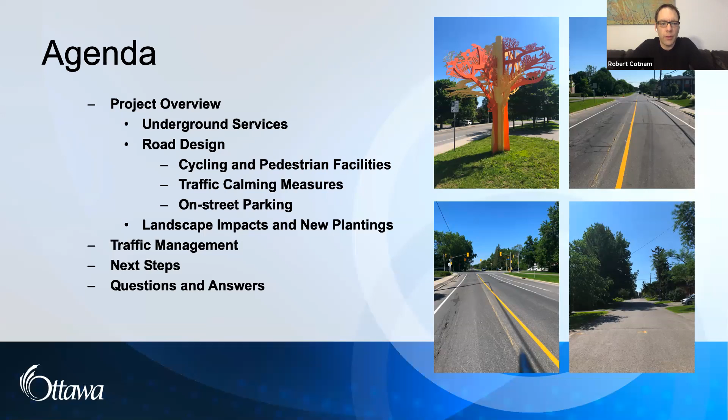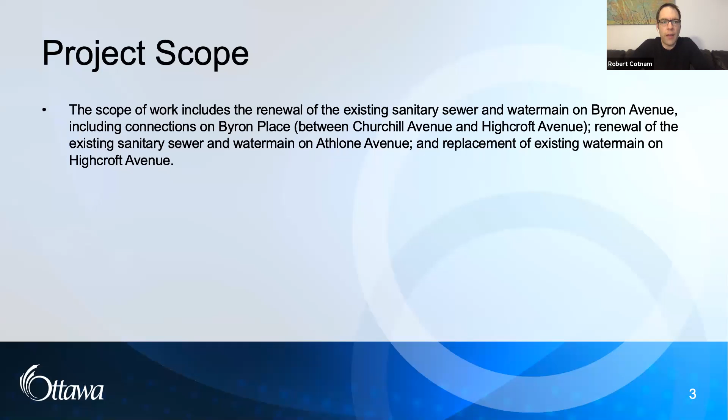As Kevin mentioned, this project is being driven as an underground project, being an integrated road reconstruction. It starts with the underground works, and because of the extent of the underground works, it warrants the full reconstruction of the surface. Taking advantage of that reconstruction, we're able to implement traffic calming measures in accordance with the Byron Avenue traffic calming design and the city's road safety initiatives, and provide enhanced cycling accommodations through the corridor, as well as bringing the pedestrian accommodations up to current city standards.

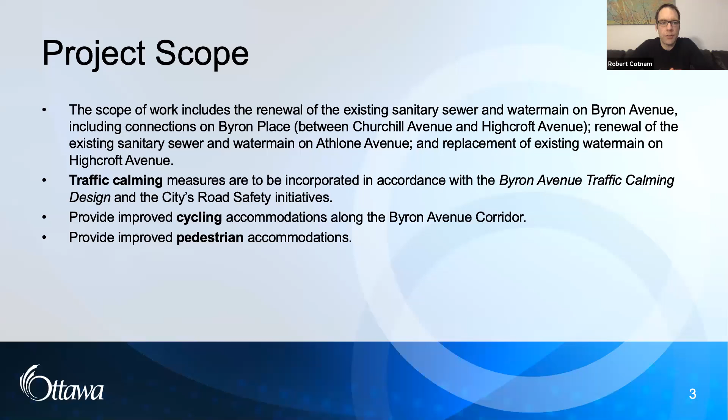Just quickly to run through the underground services for the project. As Kevin mentioned, the system is quite old, around 80 years old, and has reached the end of its serviceable life. As such, we'll be replacing the existing sanitary sewer with a new 250 millimeter sewer from Churchill to the hydro corridor, and then 250 to 450 from the hydro corridor to Hilson.

As well as a new 200 millimeter water main throughout Byron. For Athlone, similar situation - the sanitary sewer is quite old, being replaced with the 250 sanitary sewer from Byron Avenue to the dead end, as well as the 200 millimeter water main from Byron to Clare through the park. Highcroft is limited to just the 200 millimeter water main - the sewer there is not quite as old and still in good state, so it doesn't warrant replacement.

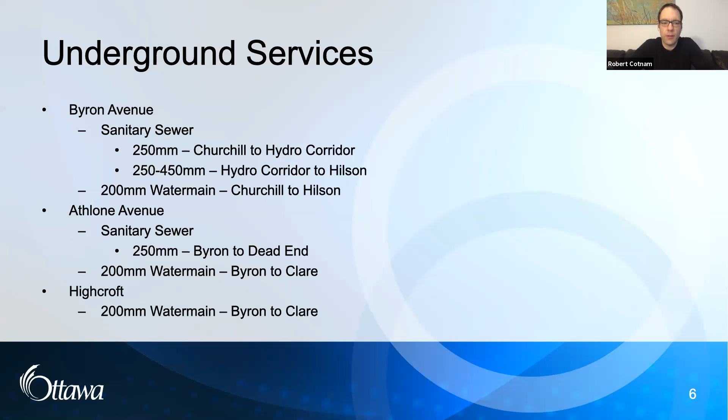For Athlone, we have the water main down the east side of the corridor with the link through the park. You can see there's some deviation in the alignment of the water main through the park - that was to protect the existing trees in the park - and the sanitary sewer down the center. Highcroft Avenue, the works are limited to water main along the east curb line, so that'll be completed through trench reinstatement.

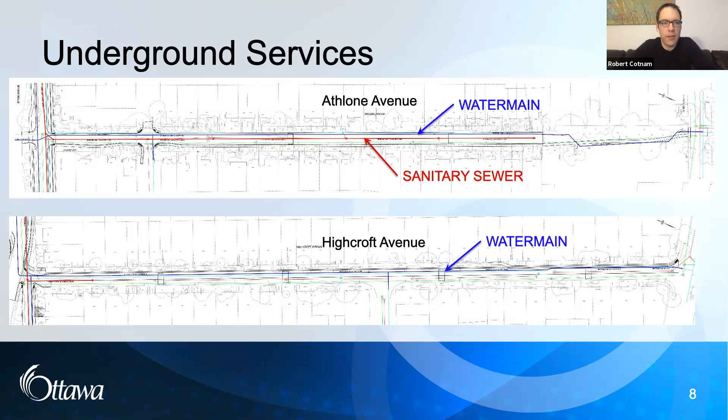Now moving on to some of the highlights for the road design for Byron Avenue, from Highcroft to Tweedsmuir, and Tweedsmuir to Hilson, and then I'll touch on a few key features, including the Kirkwood intersection and the Byron Avenue parking bay.

For the road design from Highcroft to Tweedsmuir on Byron, we're providing 4-meter lanes with some localized narrowings down to 3.5 meters, in accordance with the Byron Avenue traffic calming design and additional measures from the city's road safety initiatives. We're providing a 1.8-meter wide cycle track on both sides—segregated cycling facilities to get the bikes off the road.

There's a 1.8-meter sidewalk on the south side, bringing it up to current design standards. Included with that is the 200-millimeter demarcation stone for the Accessibility for Ontarians with Disabilities Act requirements. It's a paver stone with a pattern on top that's cane detectable, providing guidance to visually impaired pedestrians so they don't end up in conflict with the cycling facilities.

Traffic calming measures, as mentioned, include speed humps, intersection narrowings, and raised crossings in accordance with the Byron Avenue traffic calming design and the city's new initiatives. We've included a raised PXO Type C at Tweedsmuir—Type C being the pedestrian-activated flashing lights, the rapidly flashing beacons. Then there's the on-street parking bay from Eden to Athlone, with a few modifications as well.

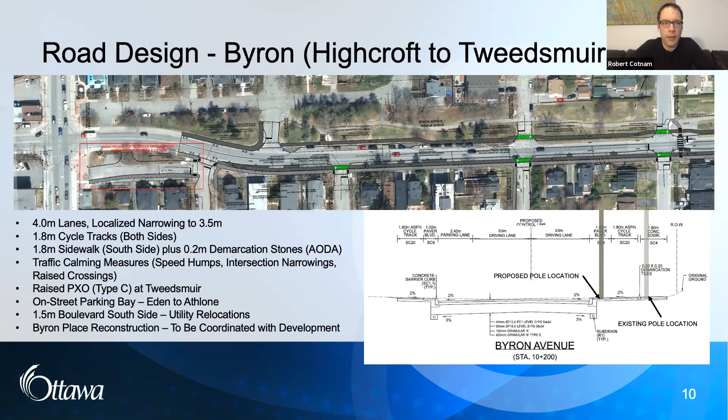A little more detail on some design highlights: between Byron from Tweedsmuir to Hilson, there are 4.0-meter lanes narrowing to 3.5 again, with 1.8-meter cycle tracks continuous on both sides, and a 1.8-meter sidewalk on the south side with the demarcation stone for AODA requirements. As Kevin mentioned, there's a protected intersection at Kirkwood, which I'll detail in a couple of slides.

Traffic calming measures again include speed humps, intersection narrowings, and raised crossings. The PXO at Hilson will be maintained—that's the current limit of our project, so we're endeavoring not to impact it, but if we do extend beyond it, it will be reinstated. There's again a 1.5-meter boulevard on the south side. There's no pole line through this section, but we do expect street lighting poles will need to be provided, so they'll be situated within that boulevard.

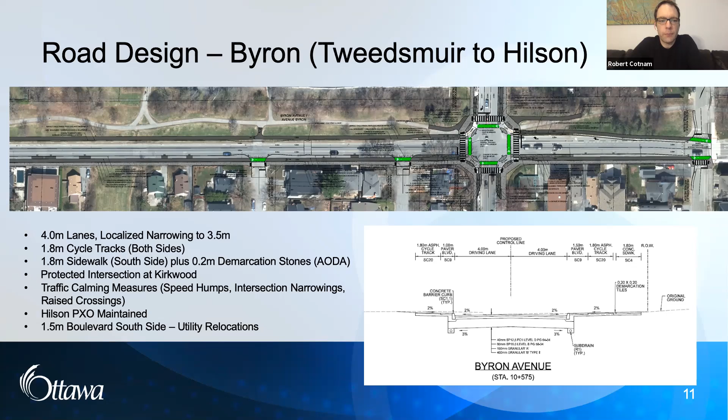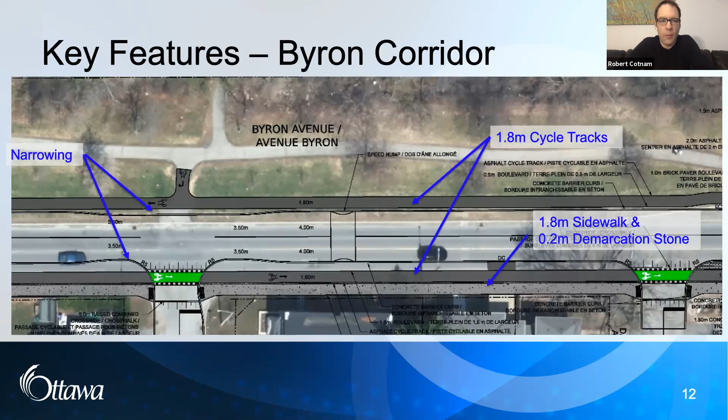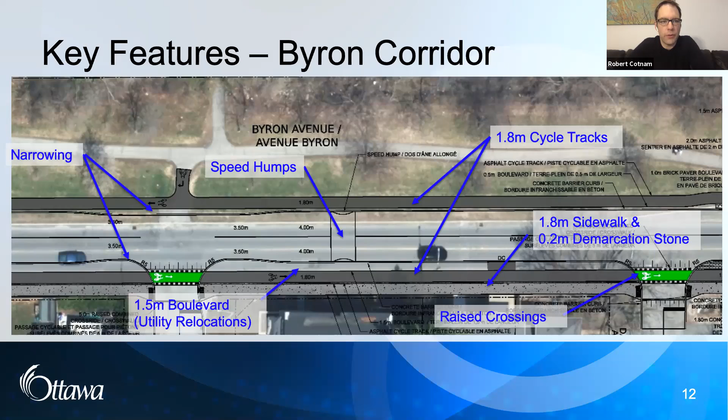Now some more in-depth detail on these elements: the 1.8-meter cycle track is the segregated facility keeping cyclists off the roads. There's an upgraded sidewalk with AODA demarcation stones, road narrowings at intersections as well as mid-block in some locations, speed humps at locations outlined in the Byron Avenue traffic calming design, and raised crossings at all intersecting streets with the exception of the protected intersection at Kirkwood. And as mentioned, the 1.5-meter boulevard is for utility relocations.

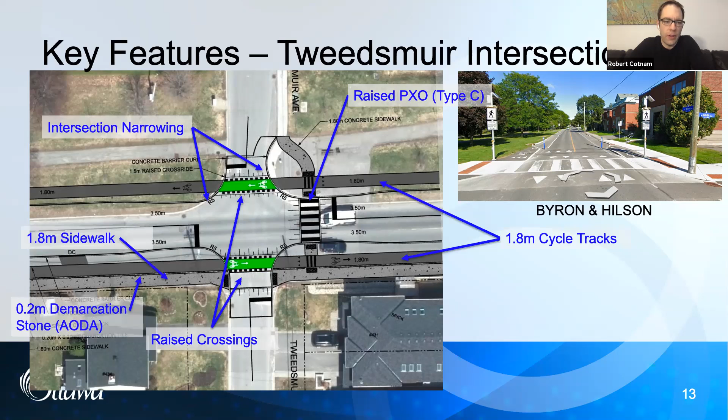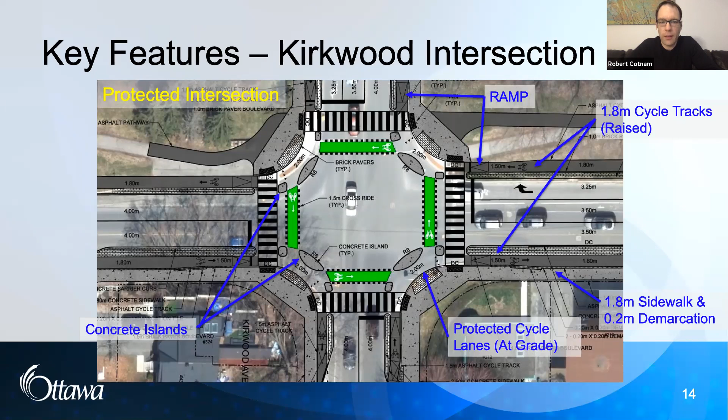Some key features of this design are the raised cycle tracks on approach to the intersection, ramping down at the intersection, with protected lanes around the perimeter where cyclists travel counterclockwise, protected from general traffic by concrete islands. There are also pedestrian and demarcation facilities incorporated as well. I also want to highlight the Byron Avenue linear park—we've provided linkages to the existing pathway through there.

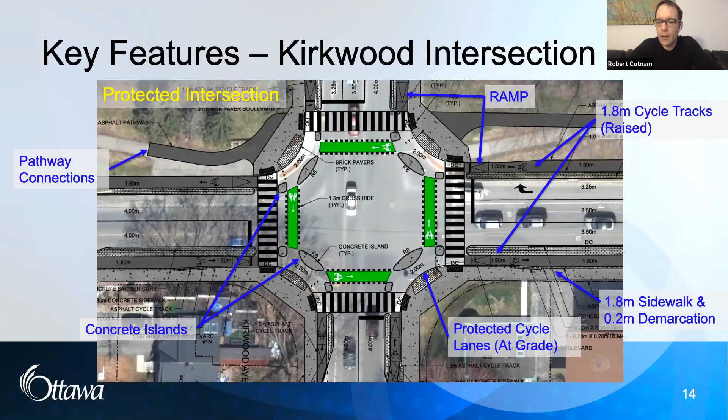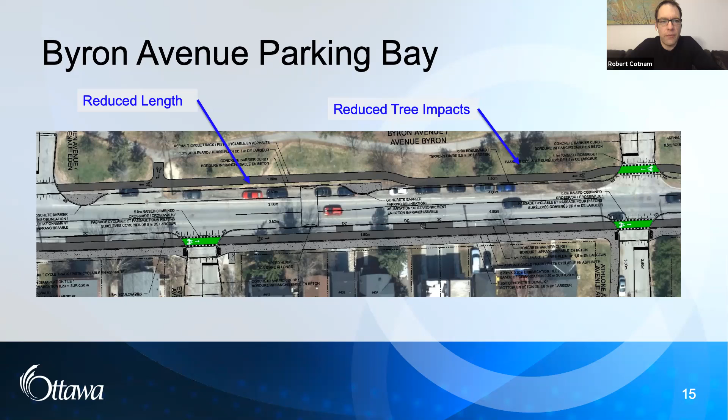Moving on to the Byron Avenue parking bay, a few modifications have been identified. Curbing is provided for better definition to keep vehicles from encroaching on the park and damaging the park space. It's also been shortened to reduce impacts on the park, since some trees toward the east end would have been impacted if the full bay had been reinstated. So it's been shortened up and better defined.

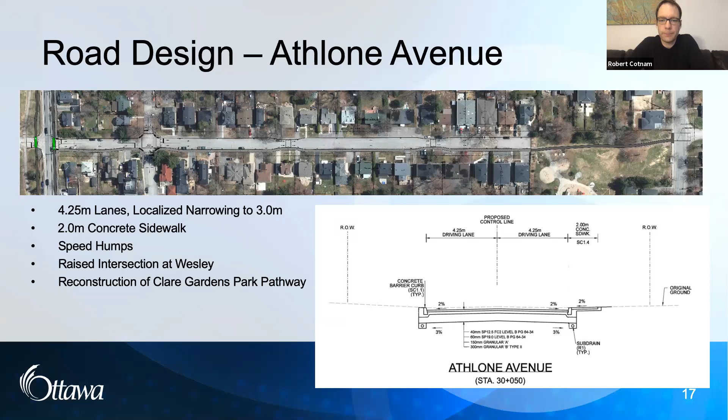I'll zoom in here for a bit more detail on the corridor. There's a 2 meter sidewalk along the west side, as mentioned, and a raised intersection at Wesley with an intersection narrowing. One feature of this narrowing is the rather large tree in the southwest quadrant of the corridor.

It was flagged by city forestry as a showstopper for the project, so we've taken every measure we can to protect that tree, including narrowing the road to pull the sidewalk and roadway away from the yard. We'll be looking at further design mitigation to ensure that tree is protected through construction.

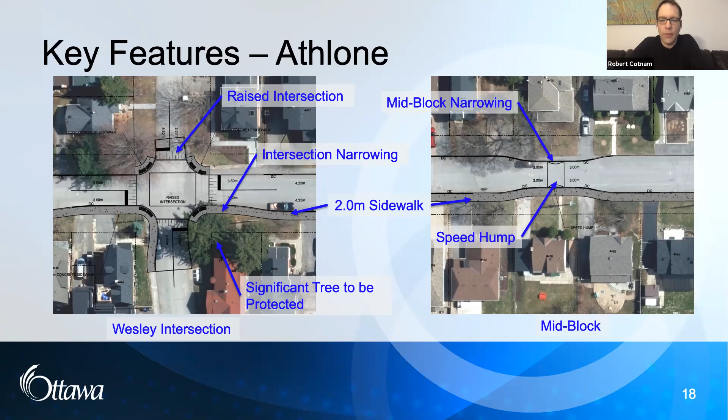For the mid-block section, narrowing to 3 meter lanes with the speed hump as mentioned. Then through Clare Gardens Park, the water main alignment, as noted, meanders a bit - that's by design to protect the trees through the park.

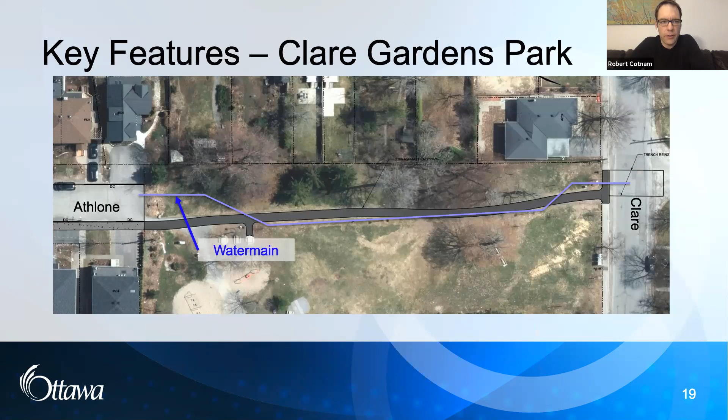There are some very significant trees along the pathway. One element to point out is that park access will be maintained through construction - the construction zone will be fenced off to keep the public away, but still allow access to the park.

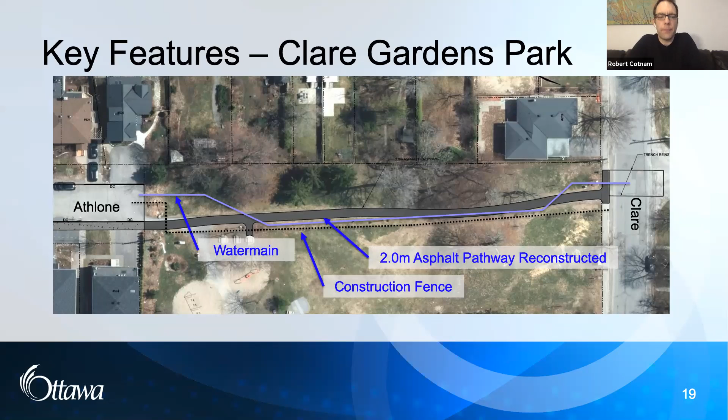The 2 meter asphalt pathway will be reconstructed because of the water main construction, and the trees will be protected. We've reviewed the alignment of the water main with both parks and forestry, and they're both satisfied with what we've presented as a way of mitigating any impacts on the trees or the park.

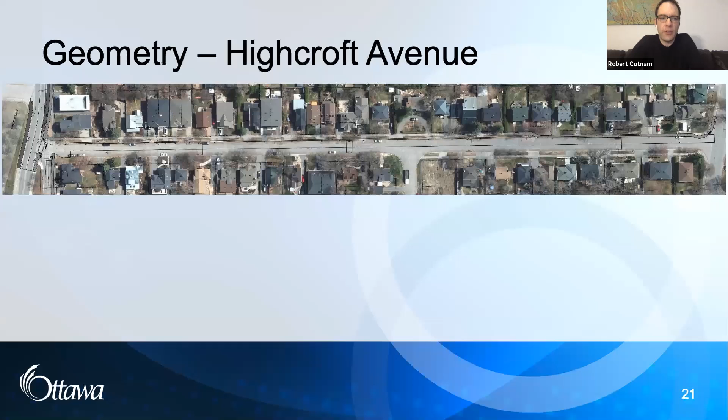For Highcroft Avenue, some key elements: it's a trench reinstatement where the existing road width is maintained. There's a narrowing at Clare, identified as part of the traffic calming initiatives.

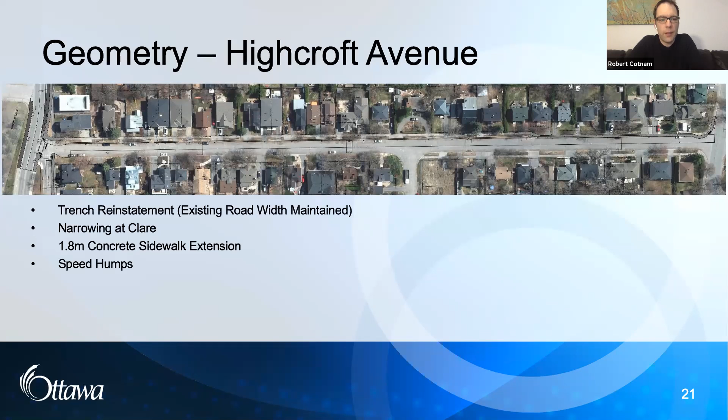There's a 1.8 meter concrete sidewalk extension. The current asphalt pathway along the east side stops about two-thirds of the way to Clare. We're extending it all the way to provide that pedestrian link, including speed humps for traffic calming. And as mentioned, the Highcroft Byron Place intersection is being coordinated with the developers.

It's our understanding that the development will be accessing off of Highcroft. As such, they've applied for some road modifications through the city and are spearheading that initiative. Our expectation is that their design will follow ours - we'll reinstate existing conditions, and they will come by and build to suit their needs.

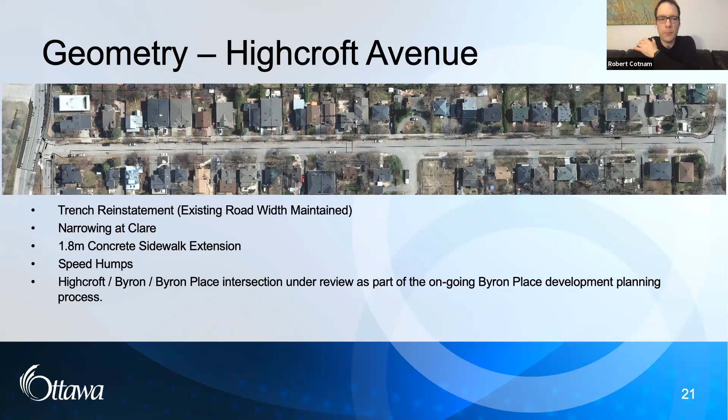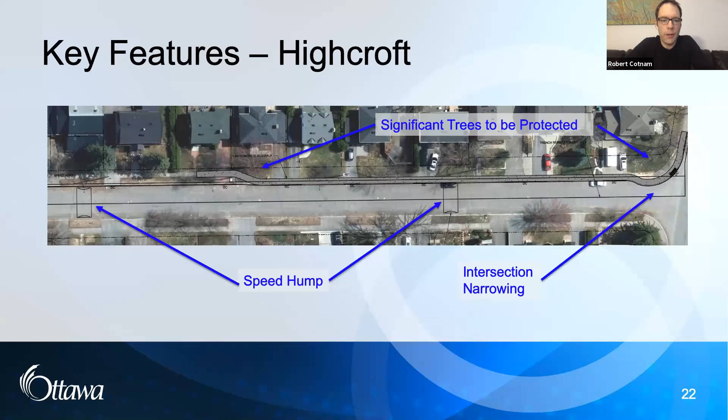Key features on Highcroft: the speed humps for traffic calming, intersection narrowing, and the extension of the sidewalk. As you'll note, the sidewalk deviates to sit behind the curb, and that's to protect some significant trees along the frontages through there.

Now switching over to look at some of the landscaping impacts and new plantings. With projects of this nature, tree impacts are generally unavoidable. We've taken every initiative we can to protect all significant or mature trees and limit the impacts to less robust or less significant trees.

We've gone through with our landscape designer and identified all the tree impacts as well as new trees proposed. As you can see from the summary table, about 23 trees will be impacted, and 89 new trees have been proposed, resulting in a compensation ratio of almost 4-to-1 for every tree impacted - almost 4 trees planted for each one.

So just to highlight some of the landscape elements, the final design of the Byron Place landscape is being coordinated with the developers, as I mentioned. The Byron Avenue parking bay has been reduced to mitigate impacts on the trees along the Byron section, between Evered and Athlone.

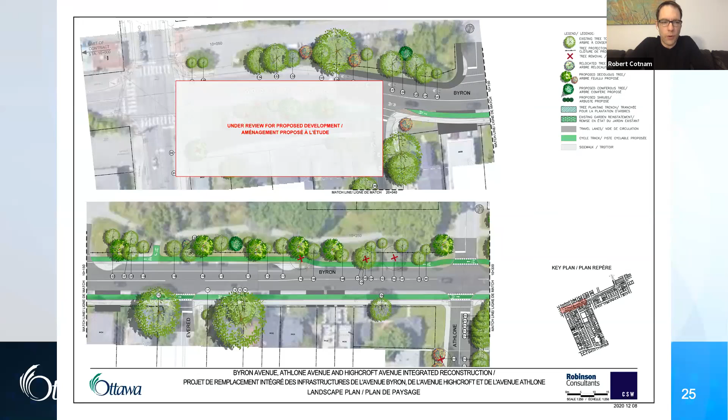Where there are a few trees that have still been impacted, compensation trees have been provided. I want to note there are some rather large private trees on private lands on the south side, which will be protected.

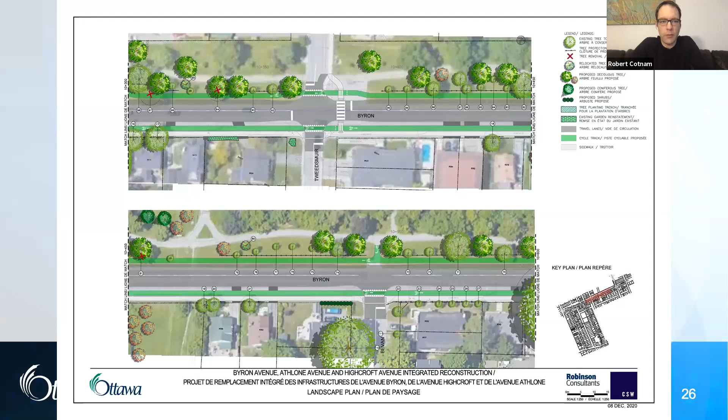Moving through Byron past Tweedsmuir and Bevan, there will be new trees all throughout the linear park identified. Then on approach to the Kirkwood intersection, there are a few minor trees on the frontages on the south side that'll be impacted, but compensation trees have been identified throughout.

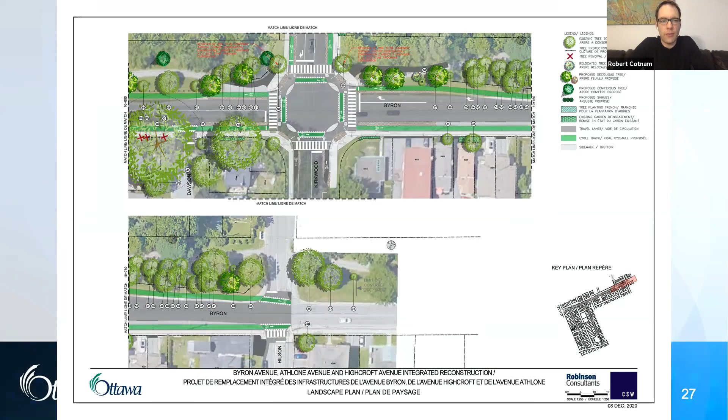At the intersection of Kirkwood, there's some trees nearby the pathway. Our pathway design has been designed to ensure that those trees can be protected as well.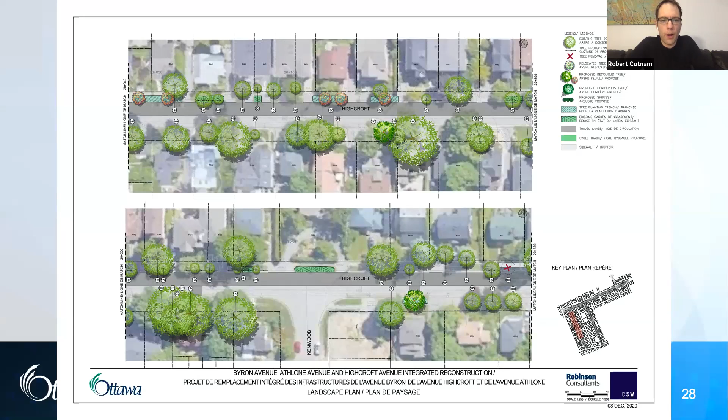Looking at Athlone, large trees, as I mentioned, particularly that one in the southwest quadrant - sorry, this is Highcroft, I jumped ahead there. Highcroft, looking at providing new trees where possible, as well as protecting the existing trees.

As I mentioned, the sidewalk will be shifted to behind the curb to protect the large trees on the frontages on approach to Clare. There's a couple of rather large ones there that city forestry was quite concerned with protecting, so we've modified the design to ensure that those are protected.

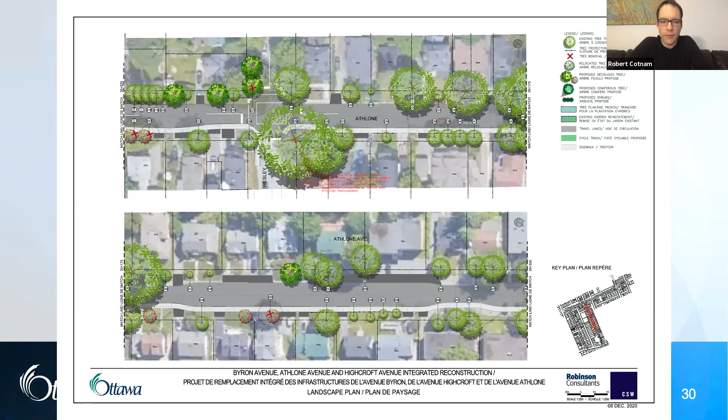Now looking at Athlone, the rather large tree in the corner of Wesley and Athlone, as I mentioned, will be protected. Again, a few trees have been noted as impacted, but significant compensation throughout.

Then Clare Gardens Park, the water main alignment has been situated in an effort to protect all the trees and maintain the trees in the park, as well as provide a bunch of compensation. So that sort of covers the landscape side of it.

Now looking at the traffic management during construction. The traffic management plan is currently in development with the city. We don't expect any full road closures as part of this project, but lane reductions and flagging operations are likely unavoidable.

With that, the cycling and pedestrian service will be continuous. Temporary facilities or detouring will be provided as necessary to ensure full connectivity for cyclists and pedestrians at all times. Transit service is on Clare and Kirkwood, and that will be maintained at all times as well.

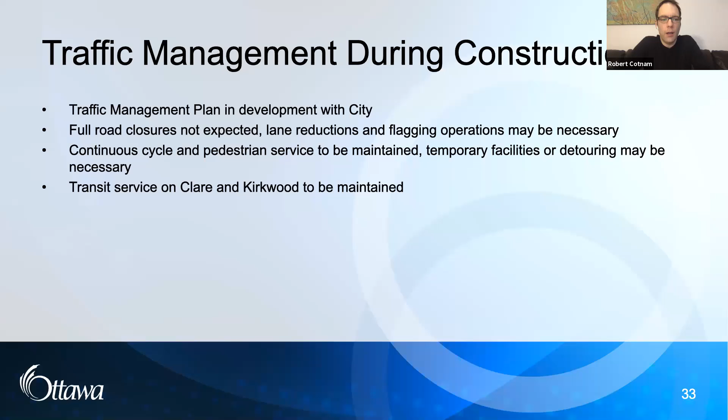Looking at the cycling element, we do know that cycle detouring may be necessary, but fortunately there is the Wesley corridor nearby Byron. So the signed detour we expect will be along Wesley using Hilson, Wesley, Highcroft to get through the project zone.

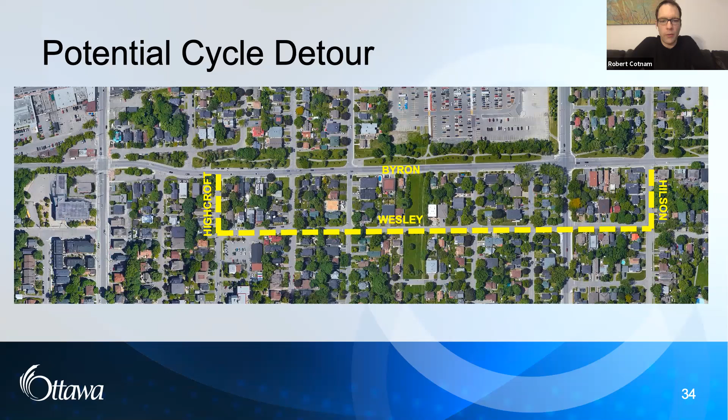But I do note there is the linear park through there as well for the less confident or leisure cyclists to access or traverse the project site. I think the signed detour route, the on-street route, will follow the Hilson, Wesley, Highcroft alignment.

Next step in schedule, as Kevin mentioned, we're going through the consultation process now through December and into January with the comments received. Our detailed design will be initiating into February through the spring, with tendering in the spring, and construction to initiate in late spring, early summer, continuing through fall 2021.

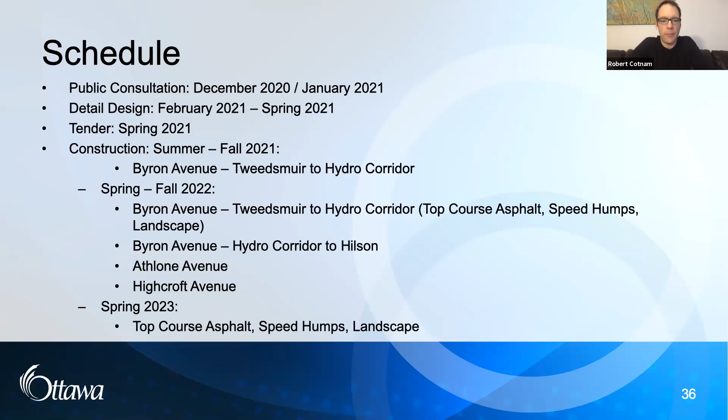Our expectation is the Byron Avenue corridor will be constructed first, with Tweedsmuir to the hydro corridor this year, and then through next construction season, the remainder of Byron plus the Athlone and Highcroft works. There is potential for some carryover into 2023 to provide final lift pavings, traffic calming measures like speed humps, as well as the landscaping elements.

And with that, I'll turn it back over to Kevin, the councillor, for questions. Thank you.

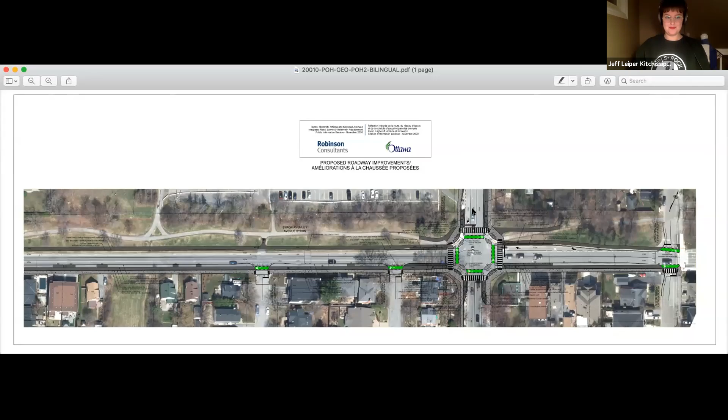All right, is that visible to everybody now? Can maybe just blow it up a bit? Yeah, zooming in there. As Kevin mentioned, there will be the linkages.

Now these connections are still being refined to ensure the impacts on the park are limited. But while this is happening, there'll be some pedestrian barrier or barrier fencing to ensure the work zone is inaccessible to pedestrians and cyclists as well. Temporary facilities or temporary connections are expected. The exact details will be fleshed out as the design progresses and we get into the staging elements of it.

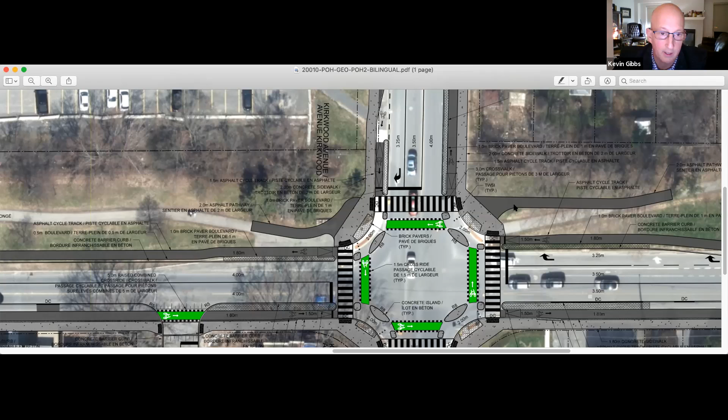Exactly, this is the preliminary design. We're looking at the big picture here and basic layouts. And as we proceed in detailed design, all the details for the connections and how we'll stage it, in terms of one part of this intersection being constructed at a time.

Accessibility and usage are priority one for the city. So we want to make sure we have connectivity with the pathway on both sides of this intersection, and that it's also accessible for people with mobility issues. The details of that will be refined further in the detailed design.

Robert, do you want to look a little bit to the east here, to the west here? I think where we connect up with... there's an interconnection there. Exactly, at Eden as well. Tweedsmuir is on the next drawing, I'll pull that up if you'd like, Kevin. There, just give me one second.

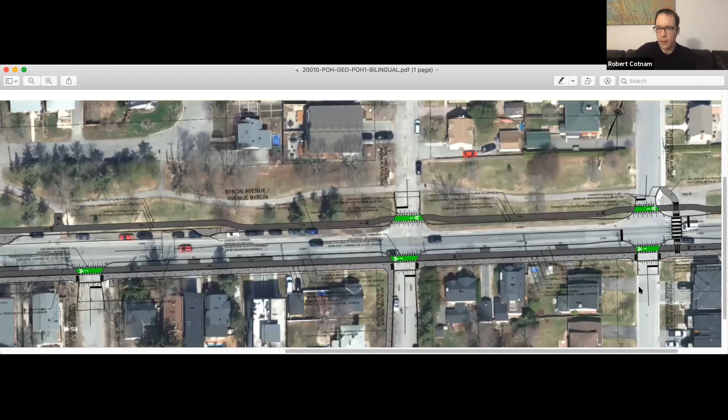And this is the Tweedsmuir. Is that visible there to everyone? Yeah, mhm, yeah.

So throughout, as we develop the detailed design, we're going to be looking at the staging of this work, how we will proceed step by step. And as I mentioned, mobility concerns for the city of Ottawa is a number one priority, not only in terms of its planned installations, but also during construction. This will be taken into account in the detailed design.

Do you want to show a little bit further to the west, Robert? We have the other connection too as well, and then the connection at the parking bay, as you mentioned there, Kevin. Yeah.

We actually have a dedicated team at the city in our department that reviews all designs to ensure that they're AODA conforming. So specialized people that are specialized in reviewing and ensuring conformity for AODA requirements.

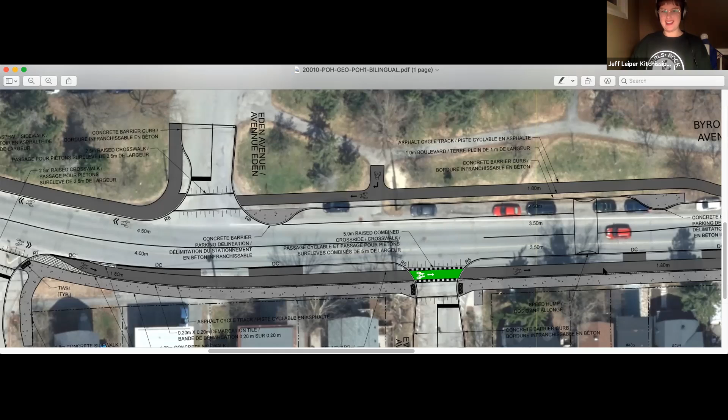Wonderful, are we ready for the next question? Yes, please. Great, so the next question reads: the raised crossings will pose difficulty for wheelchair users crossing Byron at Tweedsmuir. You want to come and look at that intersection?

Moving over to it there now. Okay.

Well, what I can say is that this is just the preliminary design, an overall picture of what it's going to look like. Like I mentioned, we actually have AODA experts on our team at the city that have reviewed projects like this all over town, and they'll ensure conformity to AODA norms. So the elevations will be such that any slopes respect the norms for AODA.

And in this case here, I believe the grade elevation of the MUP, the multi-use pathway, is probably at grade with the crossing and connecting up to the sidewalk on the south side. So the details of that we'll develop over detailed design, where we actually have cross-sectional views to see that the slopes are meeting all requirements.

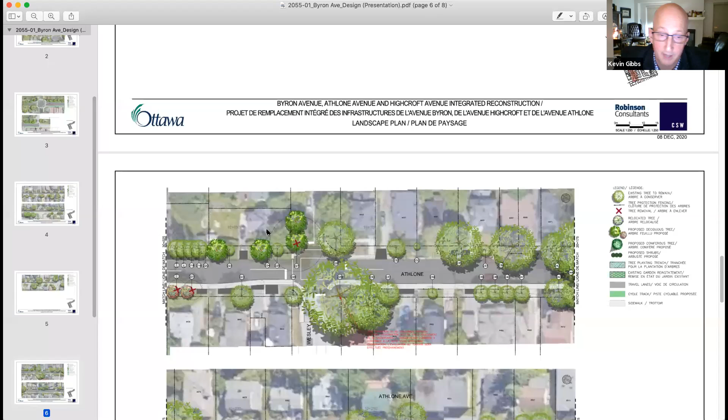Robert, can you pull up that section on the plan? Bear with me one second, Kevin, and I'll pull it up. Okay, on the subject lands, we did a detailed walkthrough with both the landscape architect and the city forestry specialist, identifying each tree, its stated condition, and essentially inventorying every tree and bush within the project right-of-way that could be impacted. We came up with a plan to minimize the removal of trees such that in some places the sidewalk has been adjusted, in other places the street has been narrowed. So where's the location, Robert?

I believe it's the one labeled as 227 there. Just to shed a little light on how these have been developed - this is the first pass based on the preliminary design. Our landscape architect has taken the plans and walked the site, trying to guesstimate where the impacts will be. As we move into more detailed design, we'll identify measures for mitigation. This is definitely one - it's a larger tree, and it's been flagged as one we would like to protect through an engineered measure if we can. So it's not a foregone conclusion it will be lost, but at this time we just take our best guess at where the impacts are going to be, and use that as a jumping-off point for further mitigation. Here's an example of where we can adapt the design to meet this type of requirement of trying to save a mature tree. So we take note, and we'll look at this very closely to see what we can do to save this tree.

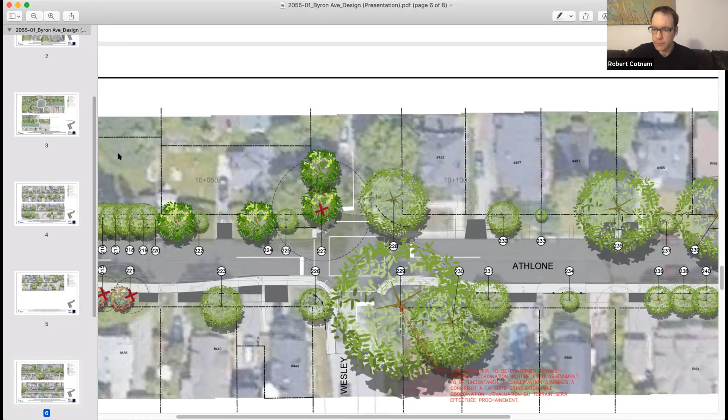I don't think 227 is necessarily the tree being referred to. 488 Athlone is actually a shared tree, almost on the property line between the city and the resident - it's pretty far back there, a little further north on the roll plan. But if the owner can write to me about 488, I'll make sure we're raising that with the project team. If you could copy me on that, I'd be grateful. I believe all my comments hold true for that - we'll evaluate all the impacts to see if there is further mitigation we can provide.

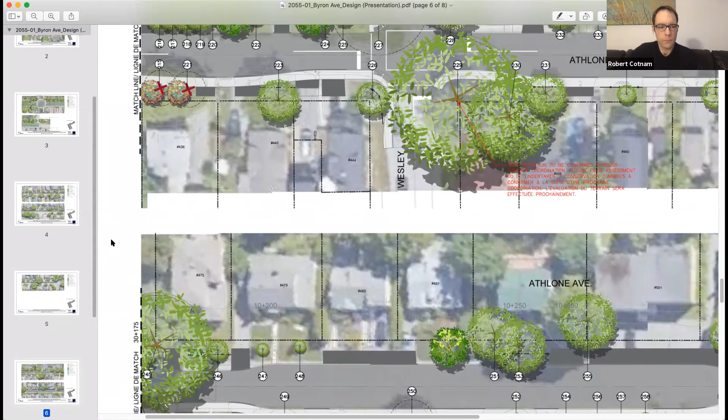Our next question: in addition to being a raised intersection at Wesley and Athlone, will it also be a narrowed intersection?

Yes, there's a tree we're protecting right on the southwest corner, and we're actually pushing the sidewalk further into the street to protect that tree. So here's an example where we're doing two things at once—increasing the traffic calming by doing this, and obviously protecting the tree.

Robert, anything else you want to add? No, that covers it, Kevin. We're moving away from the tree as well. With the raised intersection, the profile of the road comes up at that point, so there's less encroachment on the roots. We've flagged several trees throughout the corridor for enhanced protection measures during construction, such as hydrovac excavation, to limit impacts on the root systems. In advance of the project, city forestry will likely do some pre-pruning to help protect and preserve the trees. So we've gone through several measures at this intersection to provide traffic calming and protect that tree.

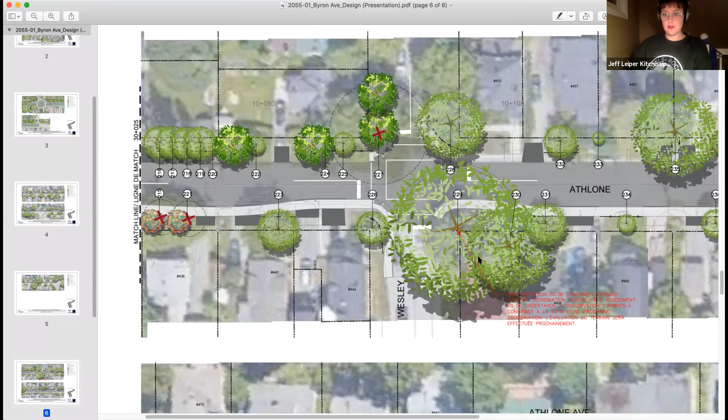So our next question asks, will there be a pathway through the park during construction from Athlone to Clare for cyclists passing through? Robert, you want to pull up that plan?

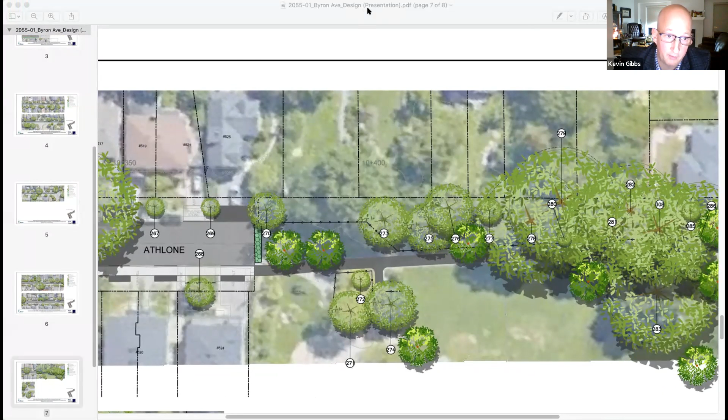So actually, we had a comment during our preliminary design requesting access through the park—I think it was the Councillor who brought this up—noting there will be kids playing in the park, so we need to make sure there's a definite hard fence separating the construction from the activities in the park. We've taken note of that, and we'll have a hard fence separating the active park from the active construction site.

So we'll need a temporary walkway to get around. As you can see, the current walkway is inside the fence, which would be under construction. So we'll put in a temporary pathway, which cyclists can use as well, to connect the dead end on Athlone to Clare to get around.

Our next question reads: with respect to Athlone, what will be the profile of the new curbs? Will it be the same along the total length, or will there be cuts for driveways? Robert, do you want to answer that one in terms of the details of the curb?

Yeah, we're just moving into that level of detail now. The presumption is the sidewalk profile will be the city's ramp-style sidewalk, where the pedestrian area is a uniform height with depressions at each individual entrance. Along the east side, where there is no sidewalk, it would be a standard barrier curb with depressions at each entrance. That's the expectation, at least.

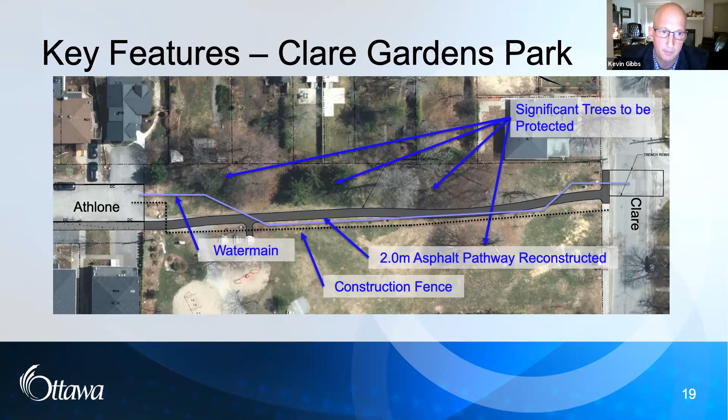I think currently there's no parking on the south side, and there's only parking on the north side. We're reducing the on-street parking near Highcroft—sorry, on Athlone, I believe, near those apartment buildings towards the end of the corridor. Our understanding is the frontage parking there is non-conforming; the parking area for those buildings is actually in behind. So in accordance with the city's bylaws, that parking will be reclaimed for softscape for the city.

I'm not sure if you can elaborate on that, Kevin. Yeah, normally whenever the city does such an infrastructure project, all non-conforming driveway entrances are converted back to conforming standards for the city bylaws for entrances. A lot of people expand their entrance on their own without getting approval from the city. So over the years, all these non-conforming entrances that don't respect the city bylaws for access have to be reconverted back to what is the standard for the city.

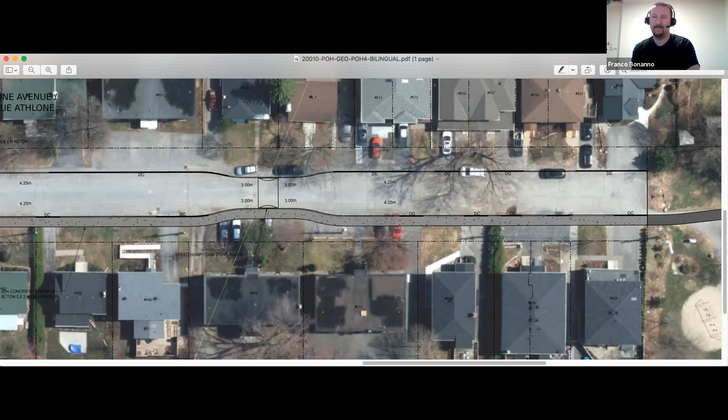We've mentioned that all the presentation boards, et cetera, are online for viewing and review for a period of time as well, right, Kevin? Correct, up until the first week of January, and we're going to maintain them throughout the duration of the project, so they'll be continuously updated. The project website is the best place to go for information.

Like I said, all the comments that are in the Q&A section will be transcribed into a list, which we'll start responding to, and they'll all be uploaded on the project website. So all the questions will be answered, and we'll be notifying you which actions will be taken.

Okay, sorry, one moment. I lost my place.

Will there be access to the westbound raised cycle track when heading north from Dawson or Bevan? Or does a cyclist have to ride along Byron to access the cycle track at Tweedsmuir?

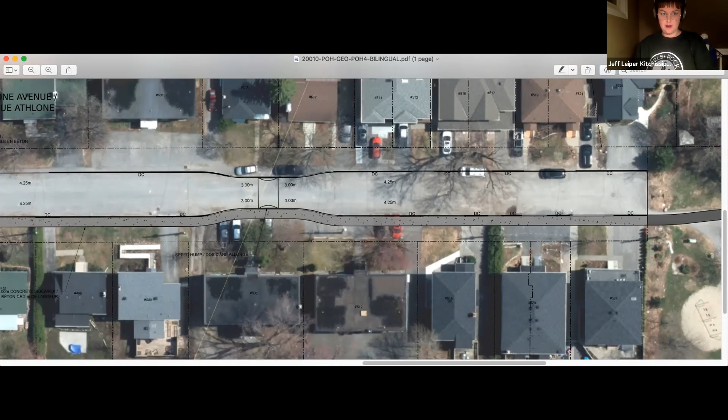Robert, do you want to pull up the plan for Byron around Tweedsmuir? Just so we get the map, or maybe the general map that shows all the surrounding connecting streets. Yep, just bear with me here one second.

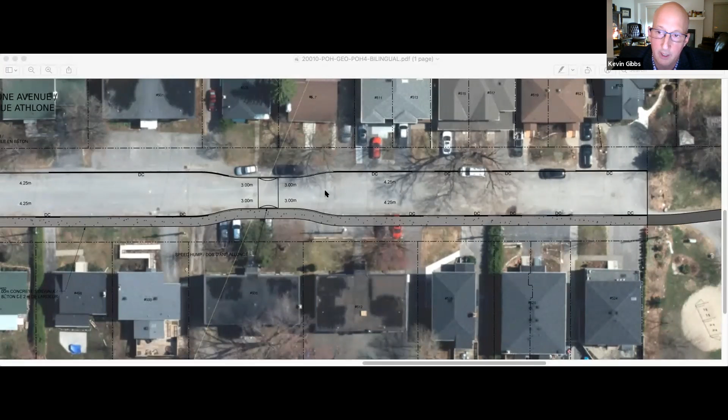As I mentioned, there's going to be a traffic management plan that looks at all aspects of managing traffic. For each phase of the construction, pedestrian traffic at every intersection will have a step-by-step procedure of how we're going to provide for pedestrian access around the construction site.

Likewise for cyclists. So, Emma, can you come back on that question and name the streets? It's access to the westbound raised cycle track when cycling north from Dawson or Bevan. So would they be able to access the cycle track from those streets, or would they have to ride along Byron and access the cycle track at Tweedsmuir? Unfortunately, some of those streets aren't labeled, but with the connections being Tweedsmuir and Kirkwood, the expectation is cyclists would have to travel to Kirkwood, cross over, and then backtrack a little bit.

There's no plan for interconnects at each individual side street at this time. I don't know if that answers it — I think that's one question we'll have to take away and look at specifically during the phasing of the works. We're planning to have a cycling detour on Wesley, and we'll look at that specifically, amongst other access and egress routes, to prepare an action plan for cyclist detours during construction for both years of construction.

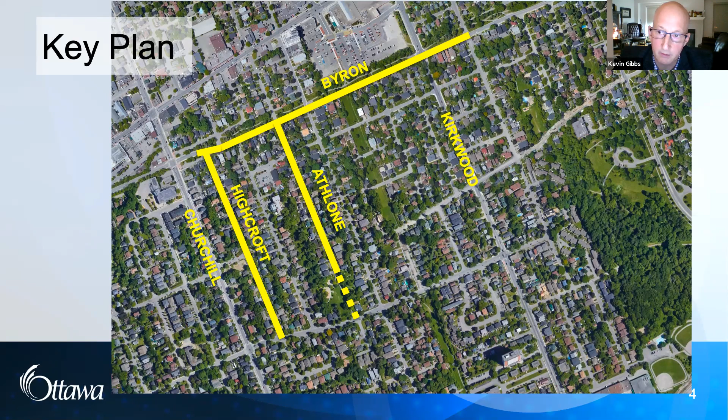Okay, to what extent beyond the current side street surface widths will excavation be necessary? Robert, do you want to answer that? In general terms, the excavation on Highcroft is going to be just for the water main, so it'll be fairly narrow. On Athlone, it'll be a little bit wider — but I'll let you answer that one, Robert.

If I'm understanding the question correctly, for the side streets that aren't Athlone or Highcroft, the limited works will be just providing the interconnect for the sanitary sewer and the water main, and then reconstruction of the intersection itself. So it will extend 10 or 15 meters at most up the side streets just to make those connections. For Highcroft, it'll be the water main construction the full length, just half road width, and for Athlone it'll be the full length, full road width, but staged so the road can be maintained open in some form.

Apologies, I'm just skimming through the questions here. There have been quite a few concerns raised about the accessibility of the street rebuild plans for Athlone. Residents are wondering, since the city has experts in this field, will they be consulting directly with folks on Athlone who may have accessibility issues that need to be resolved as they build the plan for Athlone Avenue?

As we develop the design into detailed design, we have an ongoing review process with our AODA experts. So we get to 30% development of the design, then 60%, then 90%, and at each phase it goes through our AODA review process. So we will make sure that all AODA requirements are met — so the answer is yes.

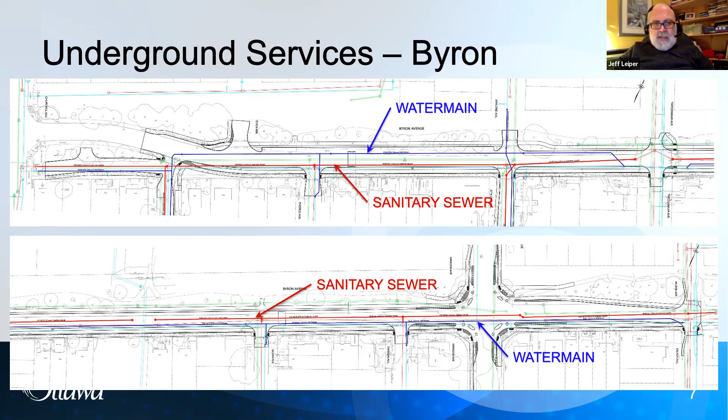There was another question. Sorry, I think I just missed it.

There was a question, a fundamental one, that's a good segue into next steps: if people don't want the traffic calming, do they have any influence over that? That's a fundamental question for this evening. The traffic calming has been designed into this project to achieve the design team's goals of reducing traffic speeds to 30 kilometers per hour.

These streets won't be rebuilt. Sorry Kevin, how many years has the water main been in operation? 80 years? 80 years, yes. So it's 80 years before we can think about rebuilding this street, most likely.